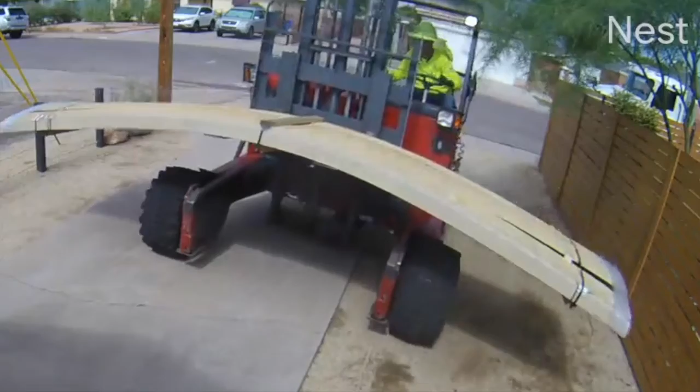Here we are two weeks later, and after all of our prep is done, it's finally time to start doing the siding. Leading up to this, we did a ton of research on siding, trying to decide whether to do engineered wood or fiber cement siding.

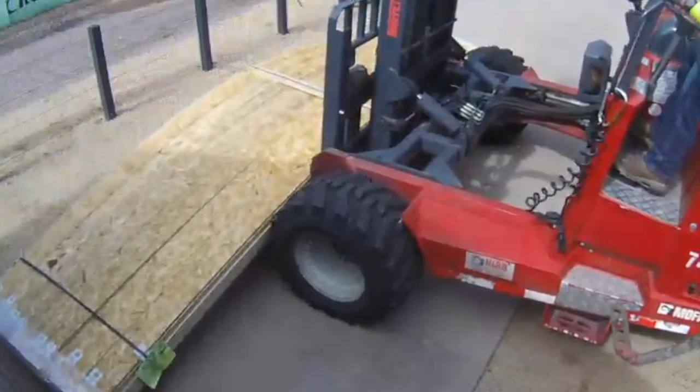We ended up going with the engineered wood primarily because the two of us can handle it. It's light enough that one person can carry it, and it's not as fragile. Also, it requires no special cutting tools, and you don't have to worry about that silica dust.

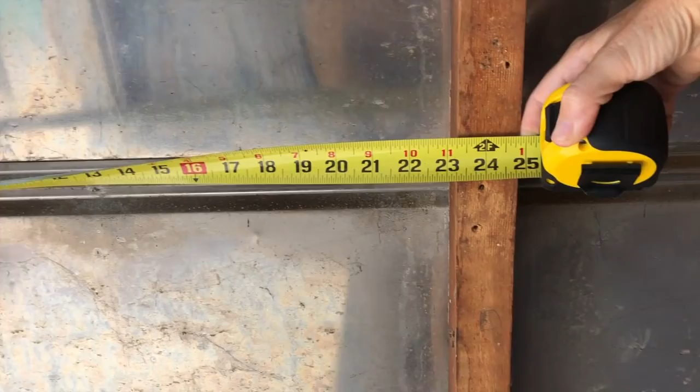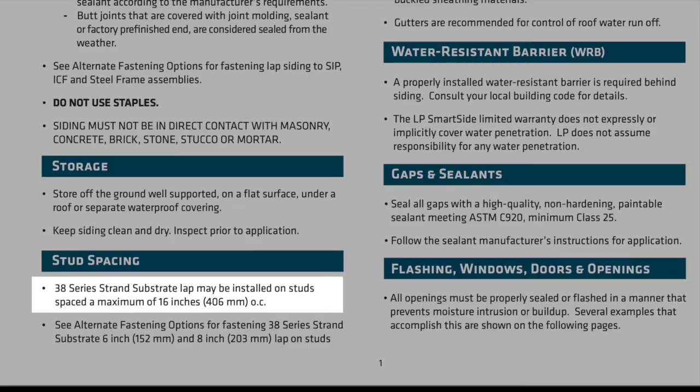The studs in the garage are 24 inches apart, so we went with the 76 series, which is 7/16 thick. We also wanted a more modern look that fits our style, so we ordered the smooth type. Unfortunately, that combination is no longer available out here, so they sent us the 38 series. It is smooth though. Problem is, because it's thinner, it needs to be installed on studs that are max 16 inches apart. So the question becomes: do we add sheathing or do we add studs?

After doing some price comparison, we went with option B. We are clearly not framing pros, nor do we have a framing nailer, so we just went with a boatload of screws and braces to add these studs.

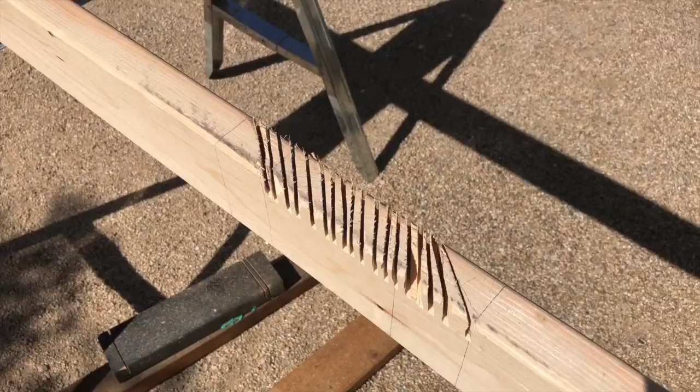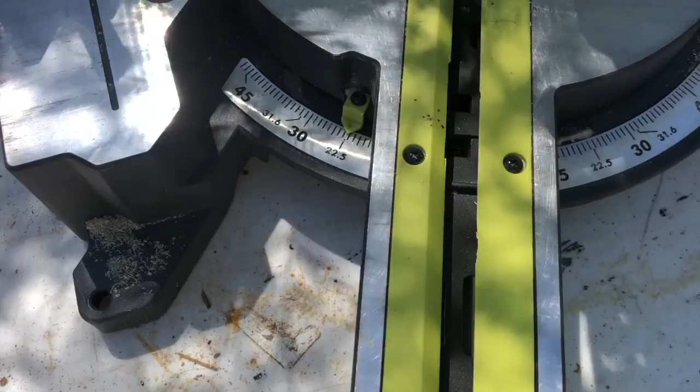Other than a few fun obstacles like this, it was a pretty straightforward process. In anticipation of working on the gables, I went ahead and bought this digital protractor. Turns out the angle I got is the same as this mark on the saw.

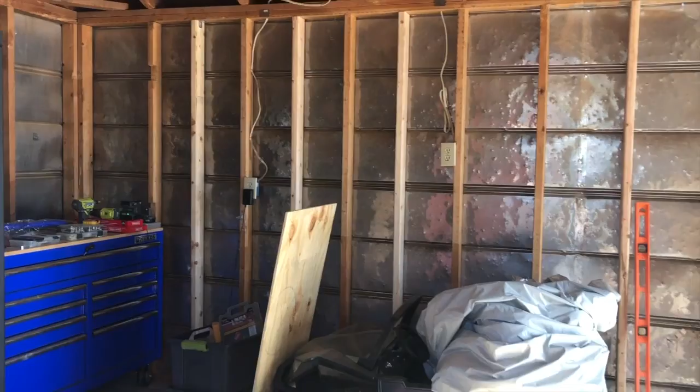Took about a day to get all these guys in, and now not only do we have more surface area to attach to, it feels like it's a little stronger in there.

Unfortunately, I had errands to run this morning, so I missed the demo of the north side, but Ames took care of it.

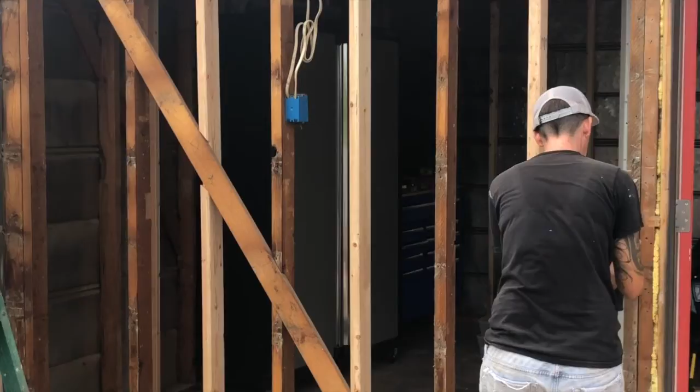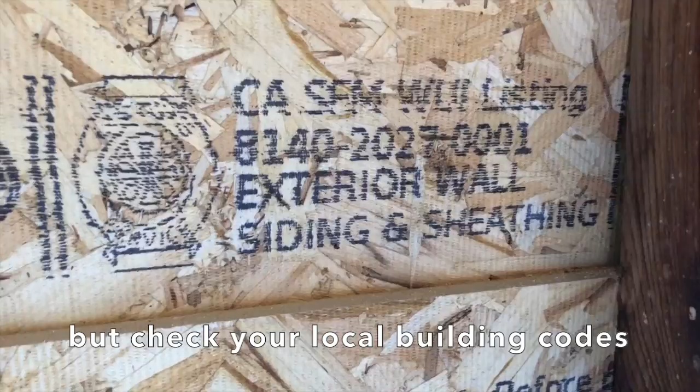Now, you might be wondering why we're not sheathing this, and that is because, according to the manufacturer, this product is a sheathing product in addition to siding. When we were pulling down the siding, we noticed that the soffit was in pretty rough shape, so we decided we're going to have to replace that all around too.

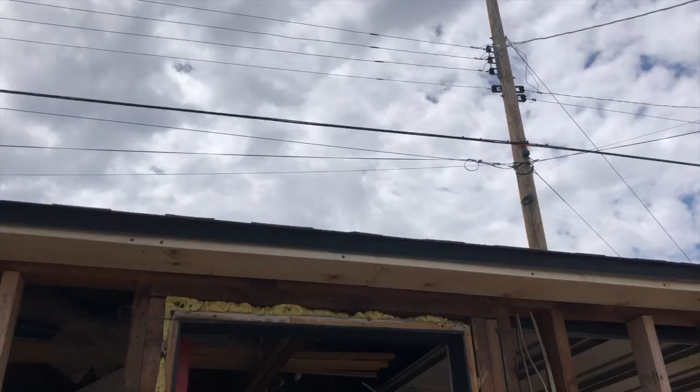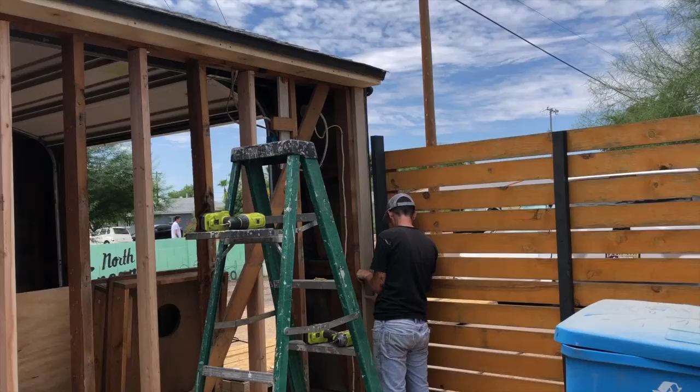Now we can finally get started with the siding, starting with the trim. Another thing the manufacturer recommends is attaching everything with hot dipped galvanized nails. As I mentioned earlier, we do not have a framing nailer, nor do we want to rent one.

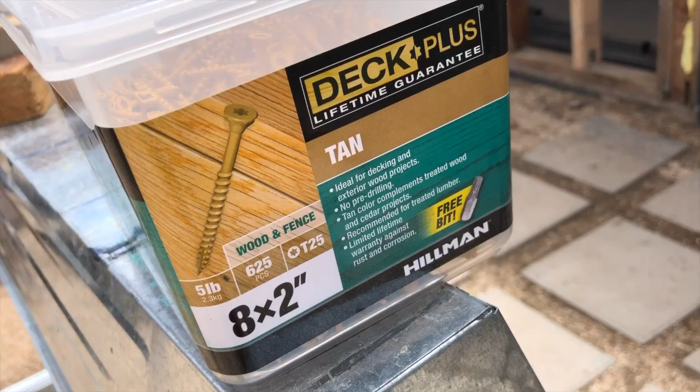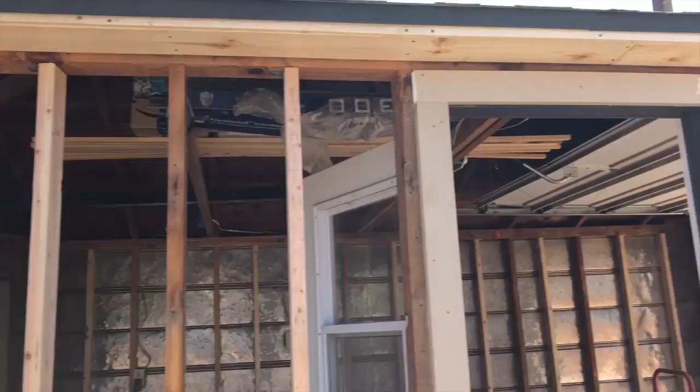So we went with screws, and I researched everywhere trying to find what kind would be good to use. I found no answers other than they should be bugle head and treated in some way to prevent rust or other staining. So we're trying these coated deck screws. Only time will tell if this is wise, but there is one caveat we noticed already, which I'll mention at the end.

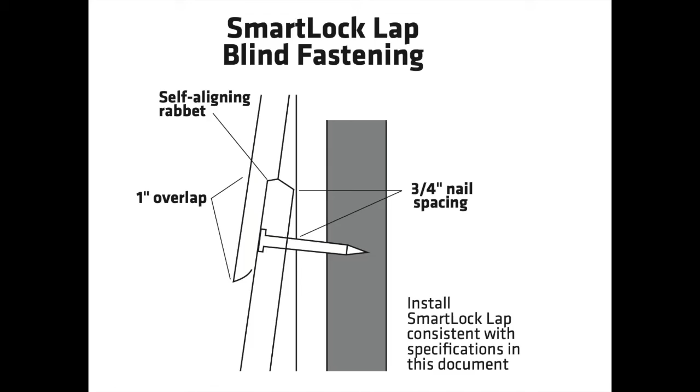After the trim is up, we put a spacer at the bottom to get that overlapping pattern to start happening. Now, to continue that overlapping in a consistent manner, we got these gauges. Unfortunately, they are for 7/16 thickness, but they still worked.

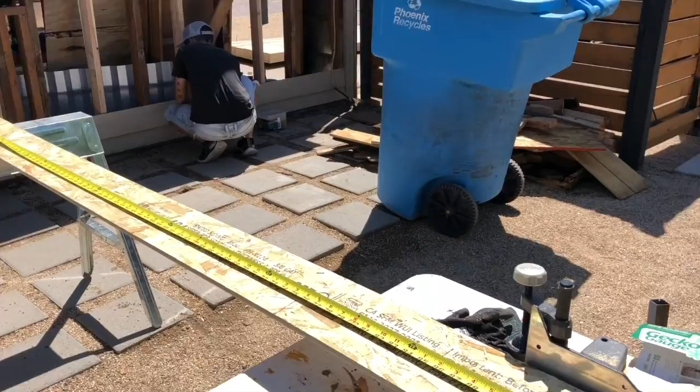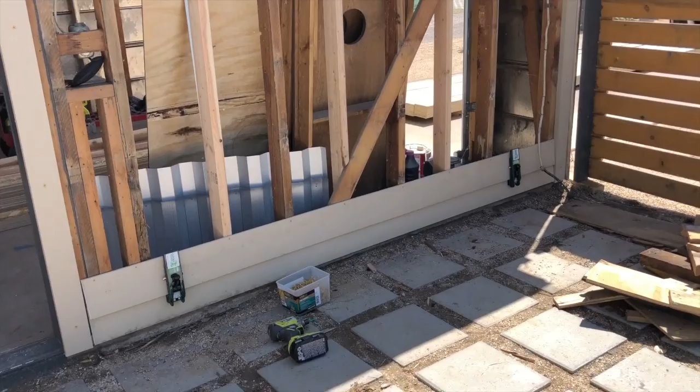Now, the other thing we need to do is make sure there is a 3/16 gap at the ends to allow for expansion, and I tried a few different ways to do that, one of which was a tile spacer, put there twice. It seemed to work okay, though it was a little tedious and the gaps seemed a little wide. These panels come primed, but anytime there was a cut, I painted the cut edges to hopefully deter any moisture from seeping in.

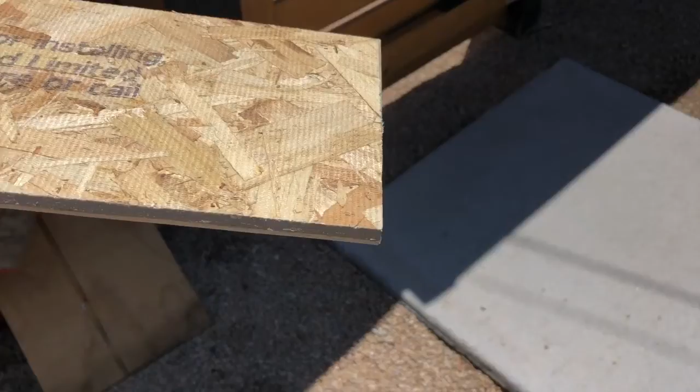Oh my god, there's a big lizard right here, baby. Is it alive or dead?

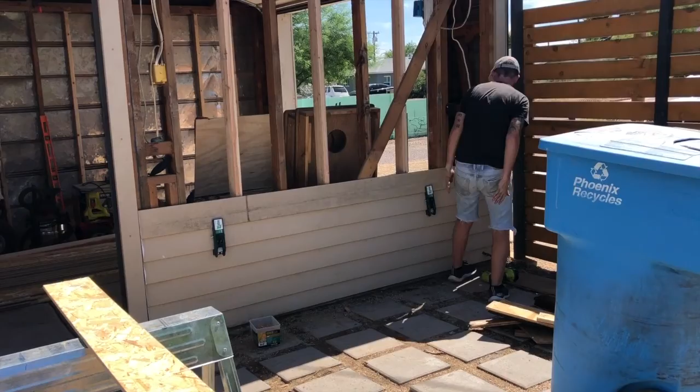It's alive. The gauges also made for like a nice spare set of hands, so she could continue attaching and I would keep cutting, and we had a nice rhythm going.

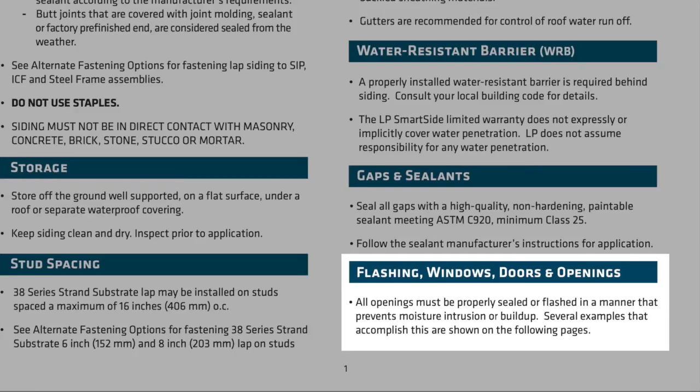Now another thing you're supposed to do is put flashing over all the openings. We did not, and we'll see how that pans out in the next few years, but we figure it's right under the eaves. We don't get a ton of rain here, and this isn't a home, it's just the garage, so we're gonna roll the dice and see what happens.

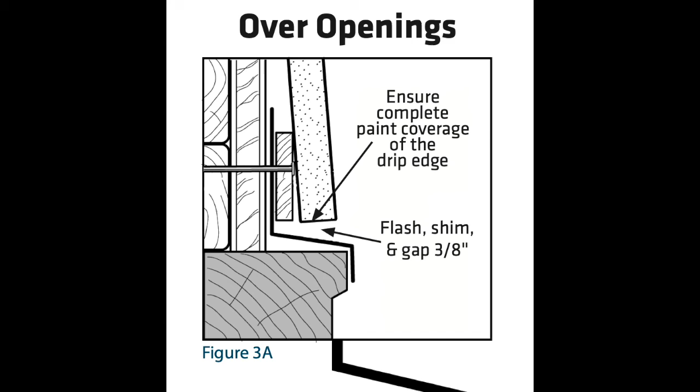Now that we got the kinks out and kind of got our feet wet, we're going to move on to the longest side. This side is going to have the longest continuous boards on it.

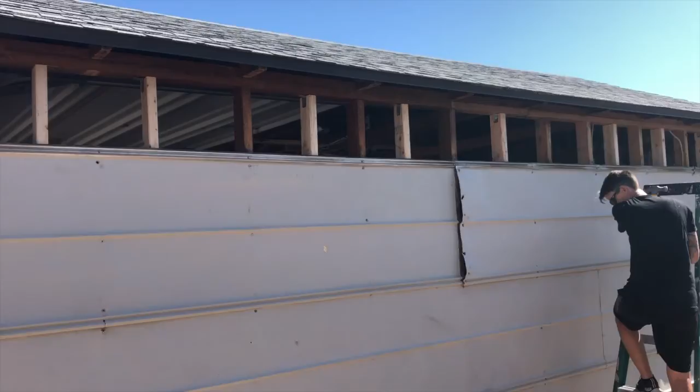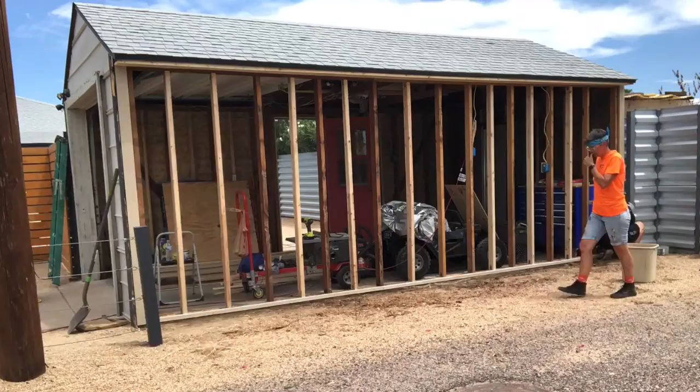With the demo done, we did just as before with the trim pieces on either side and then the spacer piece at the bottom. One thing we figured out right away is even though the side is very long, you still have to cut the boards so that the edges are at the center of a stud.

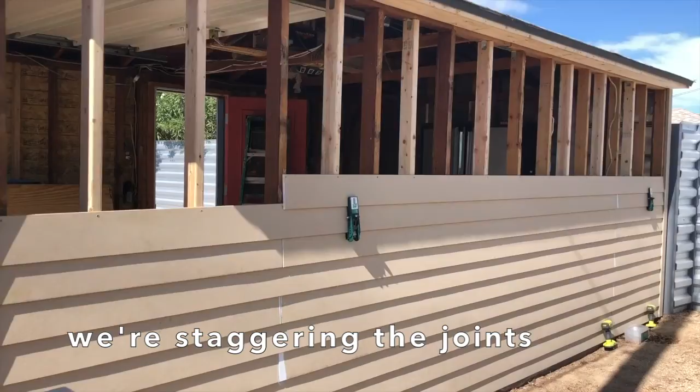With no openings or angles to deal with, it went pretty smoothly.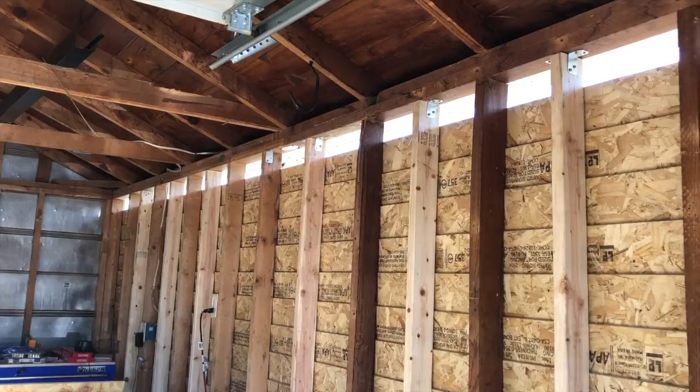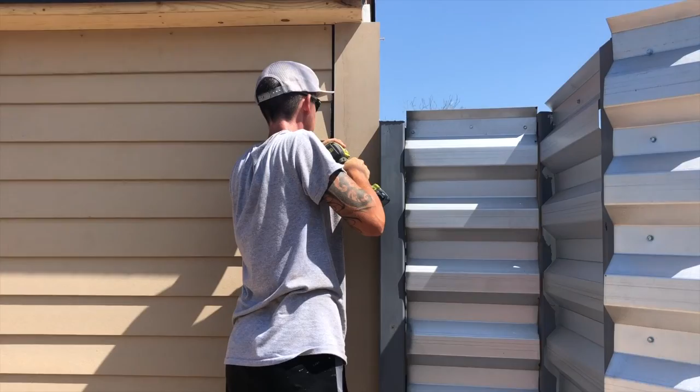As you'll see later on, there are a lot of spots where there's just not enough material to attach the trim to, and we ordered this wide trim to go on the front, and we ended up ripping it down so that there was enough to attach it to, but we kept one wide piece, and it was perfect for filling this gap between the end of the building and the fence.

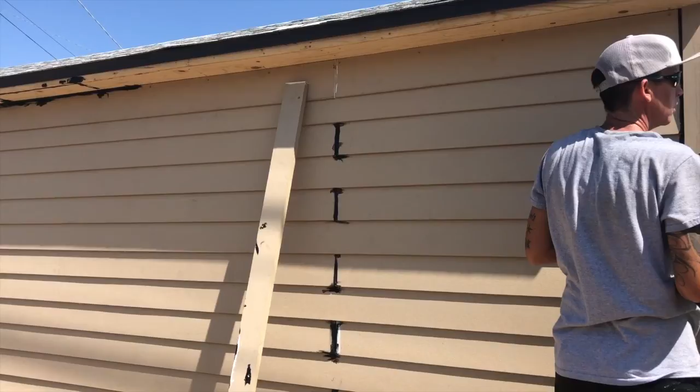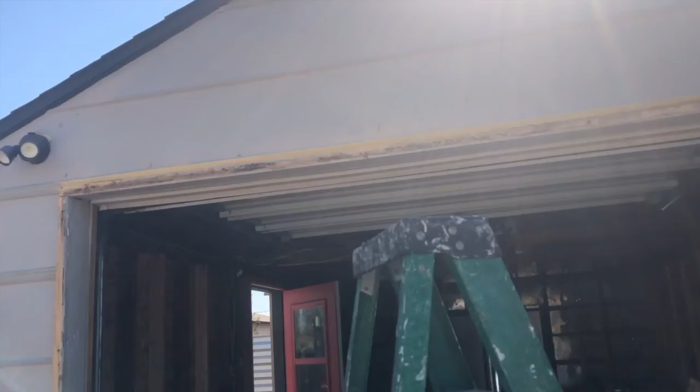I had to work the next couple of days, but Ames got some other things done off our to-do list, like fixing the opening for the garage door. We ordered a new modern door, but it is months away from delivery and installation.

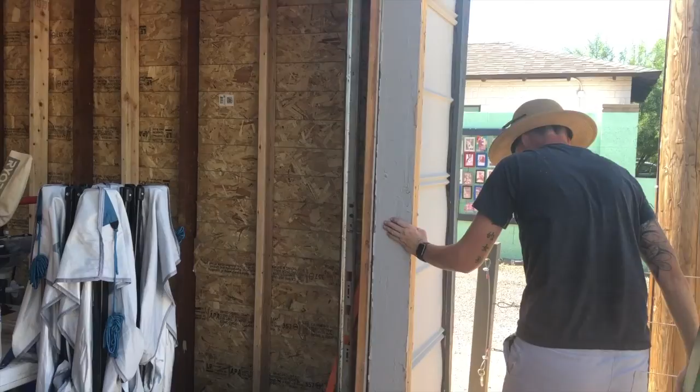Bust out the BFH. Huh? So bust out the BFH, the big f***ing hammer.

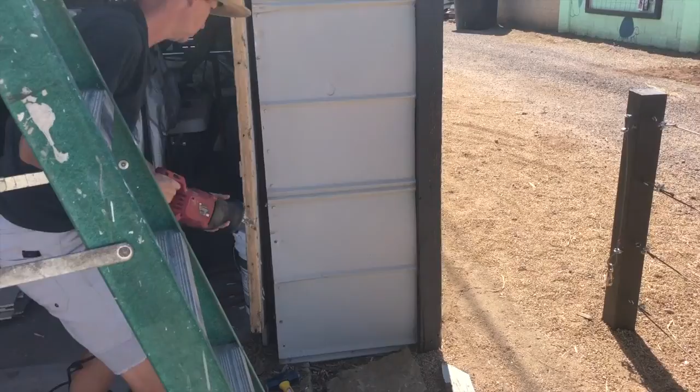All right, sneaky bastards. Yeah! Woo! Oh, yeah. Putting another 2x4 on there, that'll be fine. We'll yank this out.

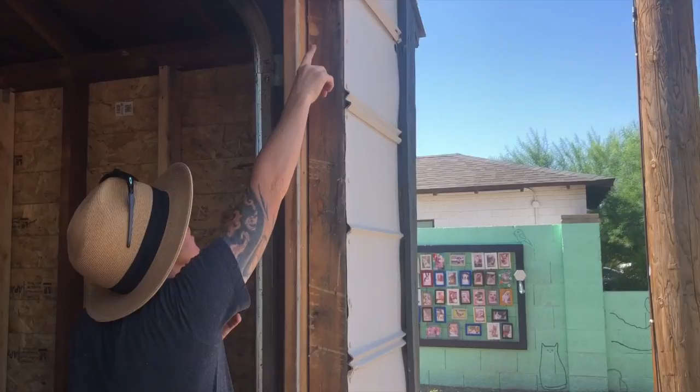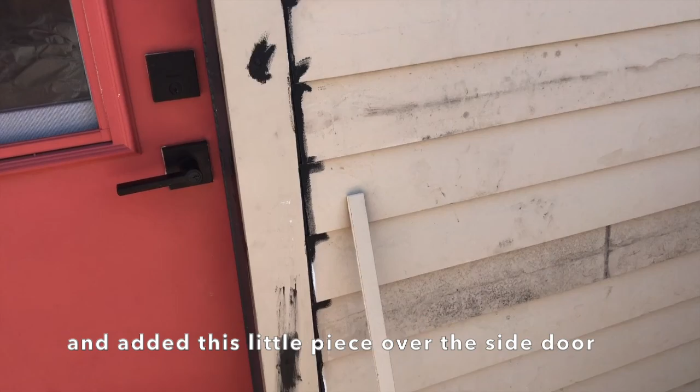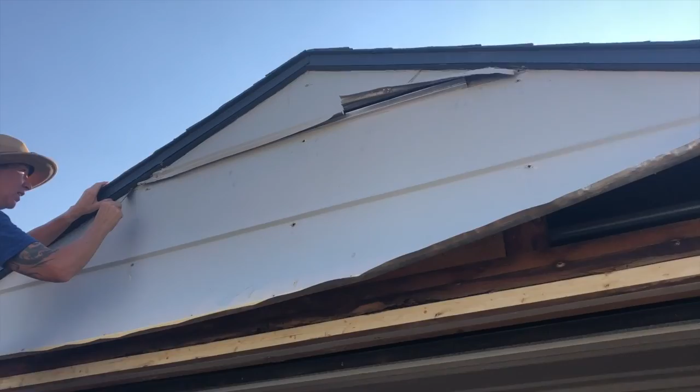Now I'm off work again and able to help out with the side I've been dreading, a gable side.

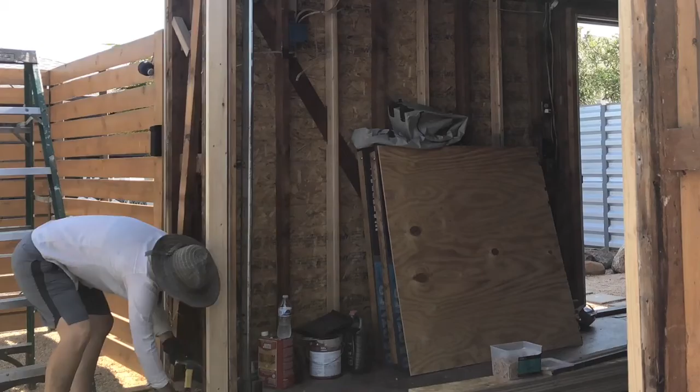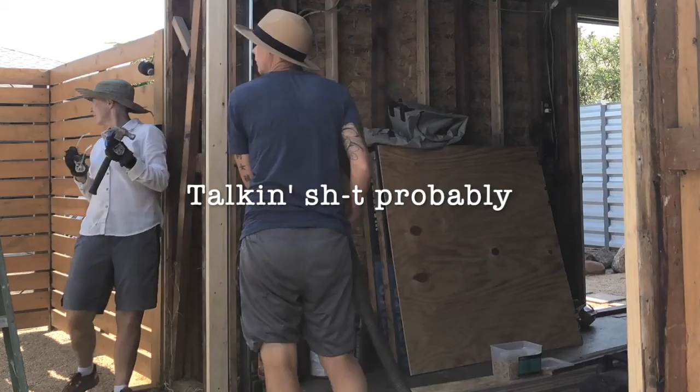Either side of the garage door is one of those areas where there just wasn't enough material to attach the trim to, so we had to beef them up a bit.

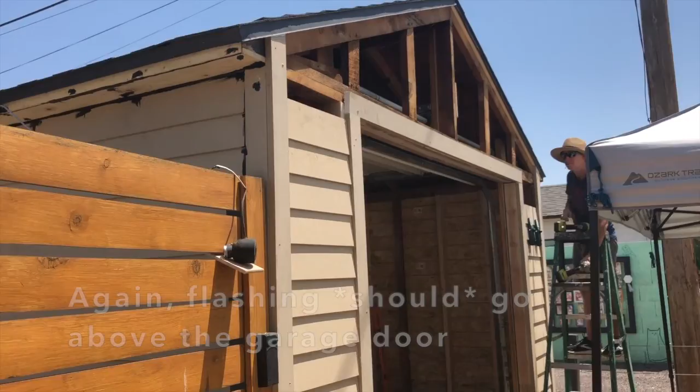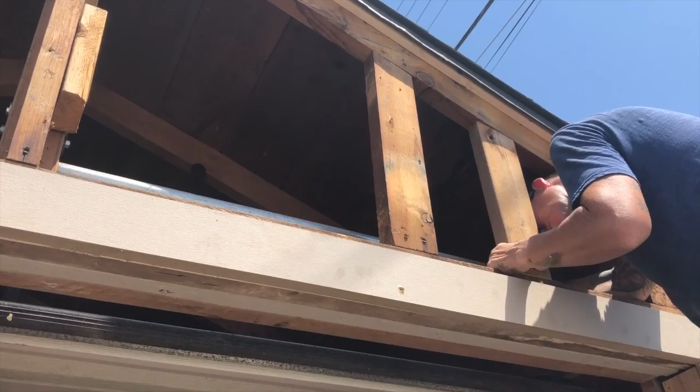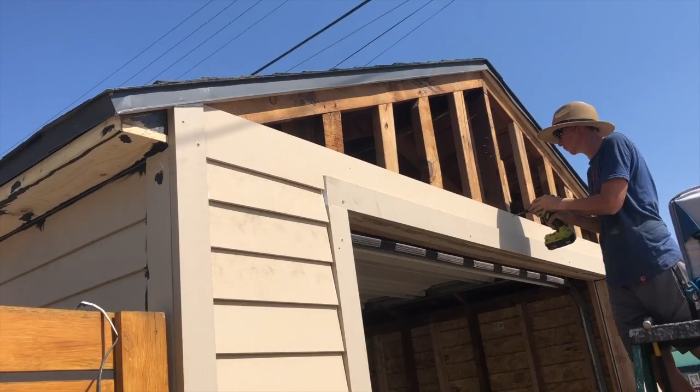At this point, we realized we neglected to add more lumber up here, so we quickly fixed that situation. We really lucked out as far as not having a lot of notched cuts to do, except for this one right at the top of the garage door, but it wasn't too bad.

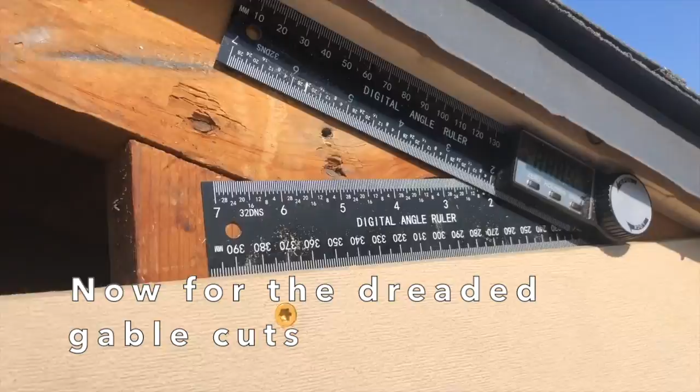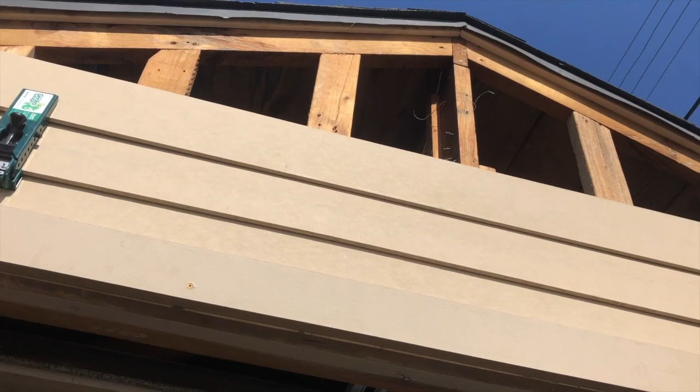Now, of course, as you go up, the lengths of these boards get shorter. To figure out our measurements, we would drop the tape into the gaps and take a measurement. You would think that that top measurement of the last board would be the bottom measurement of the next board, but we kept coming up exactly 4 inches short. I don't know why, you math geniuses can explain it to me, but we just ended up adding 4 inches to the measurement, and that worked out just fine.

We saved the best for last, which is this little torture tunnel.

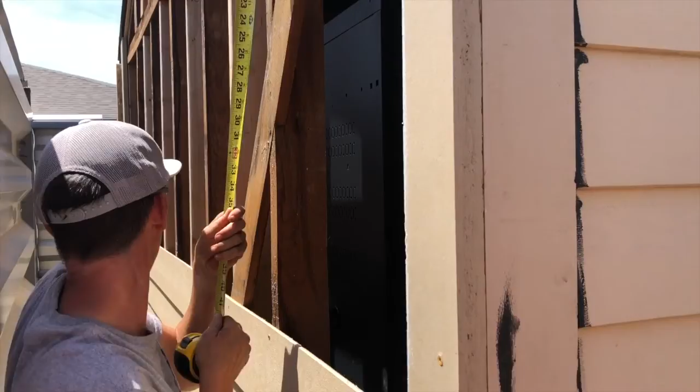Just because the building is old and not perfectly square or plumb, another thing we did is keep measuring the gap all the way down, and if there was variance, then make adjustments along the way so that you don't end up with sloping boards or uneven gaps or a weird skinny board at the top.

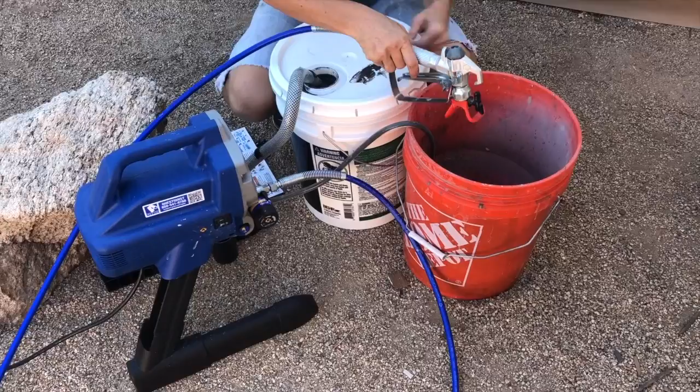Rotate spray tip to unclog. What is unclog? Nailed it. Spray. Okay. Ready to rock and roll. All right.

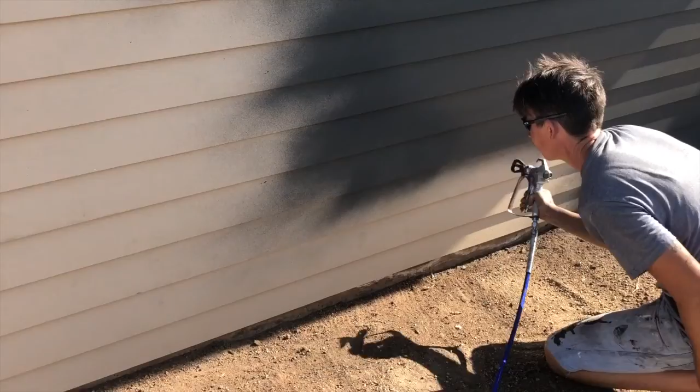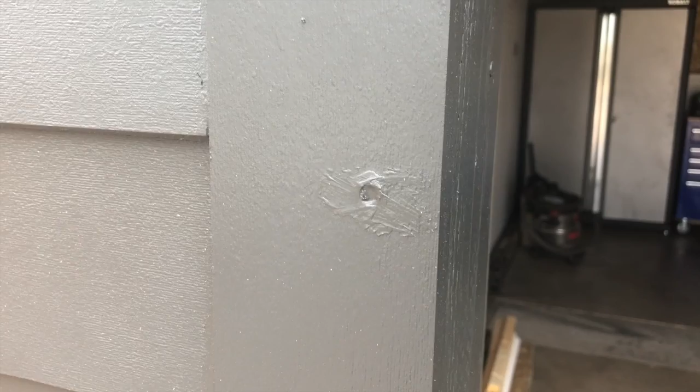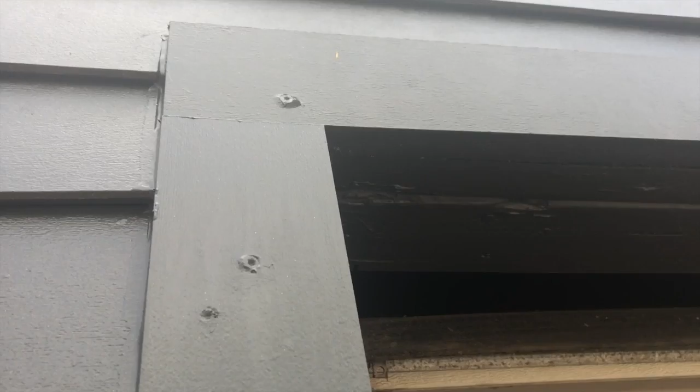Now, as I alluded to earlier, the screws seem to have worked pretty well, except in one area that we're not entirely happy about, and that is in the trim, actually anywhere that the heads show. They just kind of blew out a little bit, and then that caulk was so springy, it made it kind of like a crown at the top. So in those areas, we are going to hand drive in some of those hot galvanized nails and pull out the screws and fill the holes. Other than that, very pleased with how this turned out.